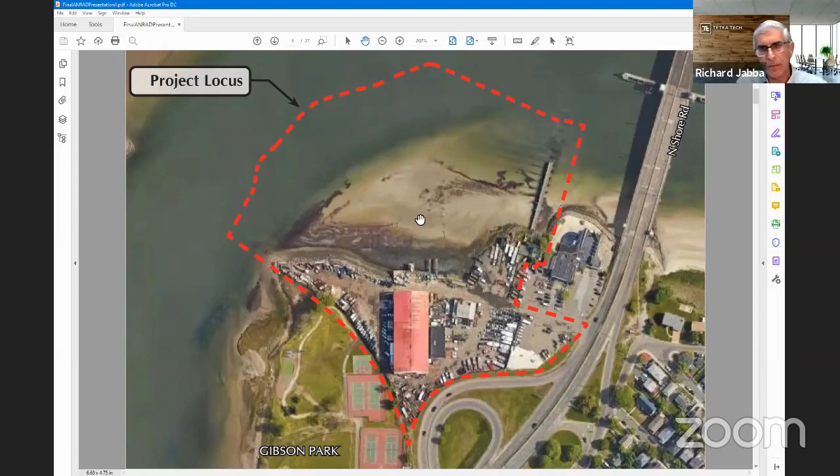So this is a view looking at the parcels and the survey of the area. There are 4 parcels, the largest one being the main one where the current towing operation is. And on that parcel, there's 3 buildings. Next to it is the National Grid parcel towards the right. And then on the far right are the 2 other parcels.

So again, the project site is mainly a relatively flat site at approximately elevation 10, FEMA elevation of 10. It's mostly within the flood zone, and I'll go over the flood zone areas in a minute. The site is completely developed along its entire borders and all the parcels with either buildings or pavement or gravel. And again, I'll go through that in a minute.

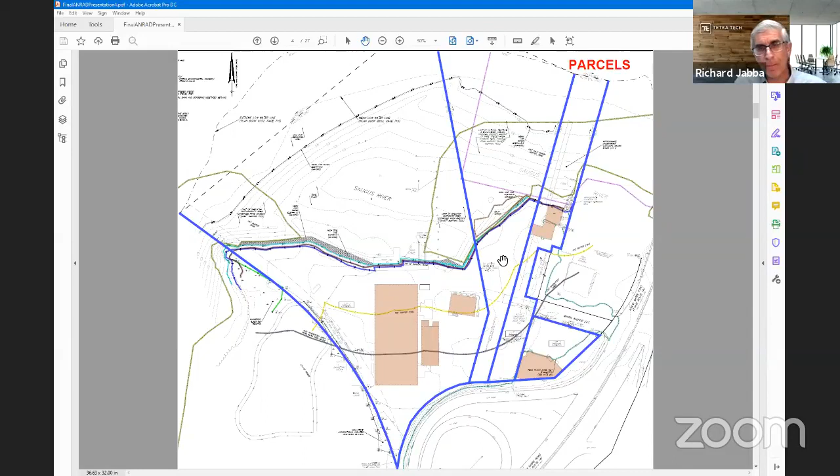So the resource areas that we're looking to get your approval on are the bordering vegetated wetlands, tidal flats, land containing shellfish, estimated habitats of rare wildlife, coastal bank, salt marsh, a fish run, riverfront area, and land subject to coastal storm flowage.

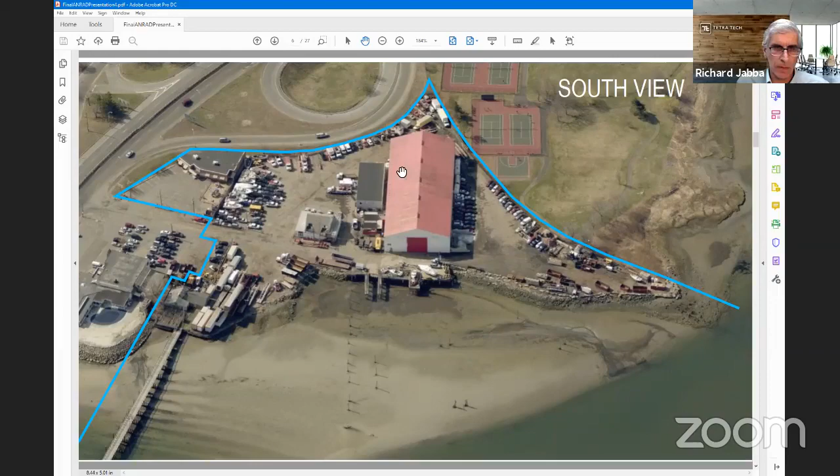This was originally marshlands that had been filled over the past 50 years or so. There was a marina that operated there, Fowler Marine. There are still some piers along the shoreline, and I think they're still currently in use. But essentially the entire shoreline's been developed. And I'll go through some of the pictures of that shoreline area. But behind all the shoreline, again, it's been all disturbed wetland resource areas.

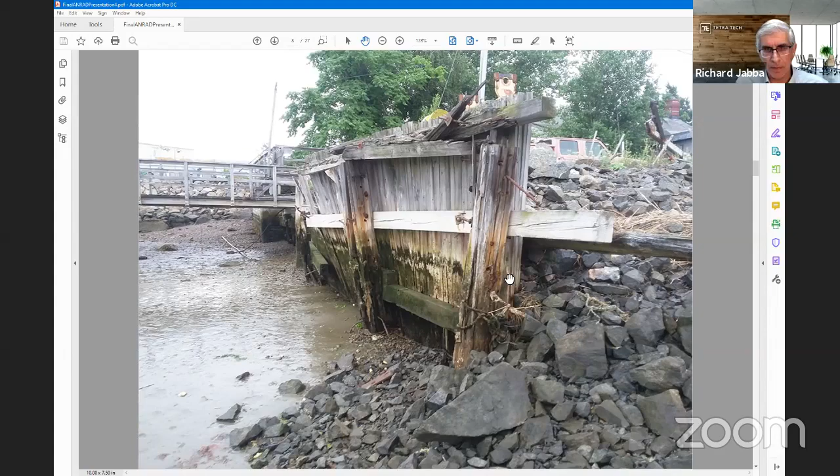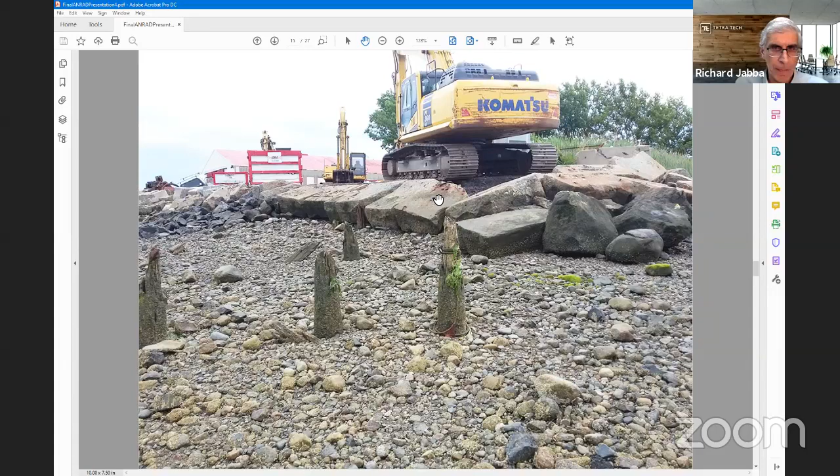And lastly, in the corner to the west is a view looking towards the east. These are actually old piles from the bridge of the Boston and Maine Railroad that went to Revere Beach. So that's what this property borders, that former railway. And this is a view of the wetlands looking from Gibson Park towards the site that you had just seen.

So now I wanted to go through each of the wetland areas and explain where they are. And so again, this is the west side of the site. Looking in plan, north is on the top. And there is a bordering vegetated wetland. It's approximately 21 feet in length that runs just inside the property line and extends further into Gibson Park on the south side. So that's the bordering vegetated wetland. Okay.

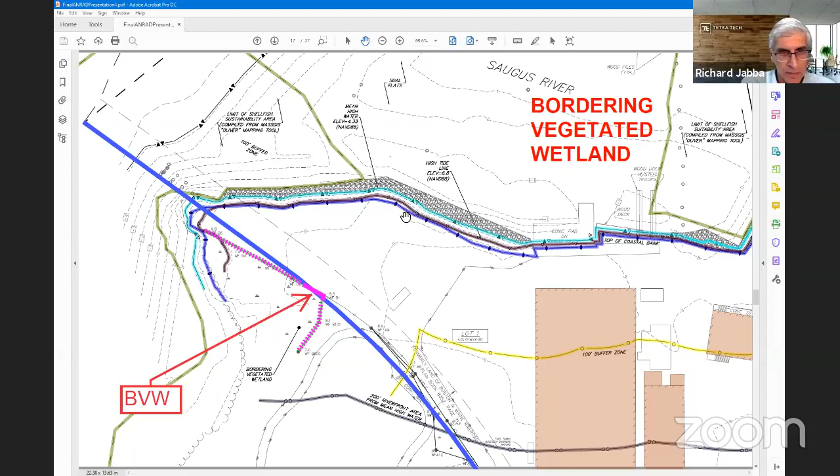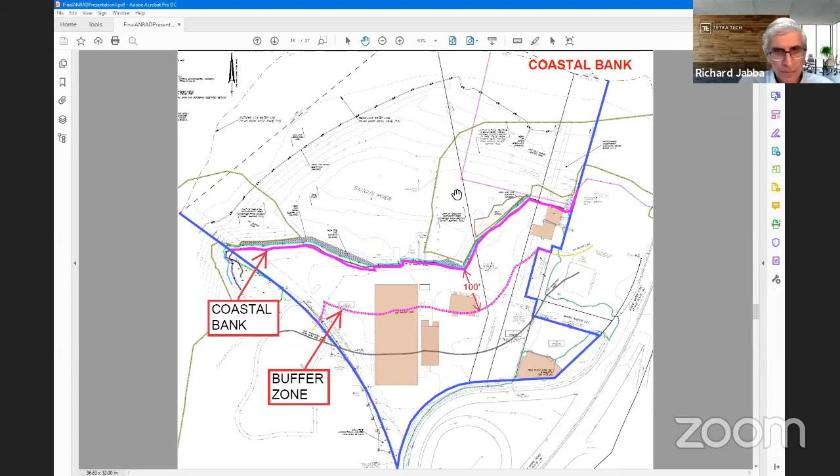Coastal bank. So coastal bank runs along the entire length of the shoreline, extending from the bottom of the bank, which is determined by slope, up to the top of the bank, again determined by slope. So it's essentially the entire shoreline running from east to west, including the vertical walls. And it has a 100-foot buffer zone that extends landward into the site.

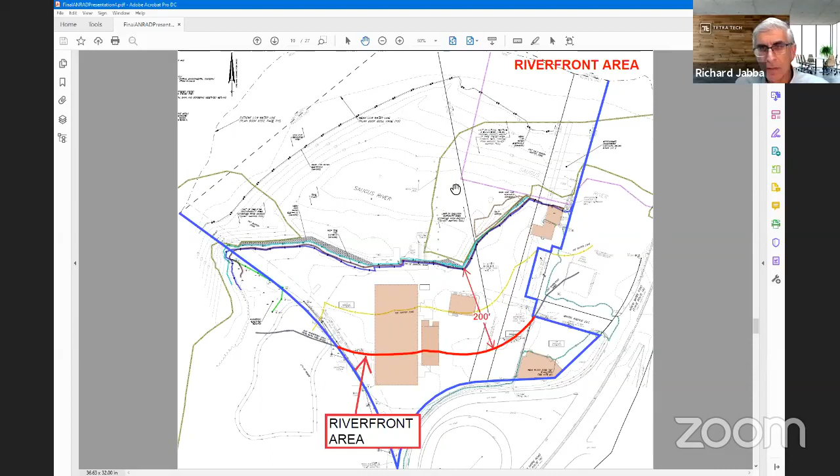The riverfront area extends from the mean high water, which runs essentially the same place as the coastal bank, and extends 200 feet landward of that area, so extends into most of the site. The tidal flat extends from the base of the coastal bank seaward to the mean low water line. So it's essentially all the area between the base of the coastal bank and the mean low water, which is this double dashed line within the Saugus River.

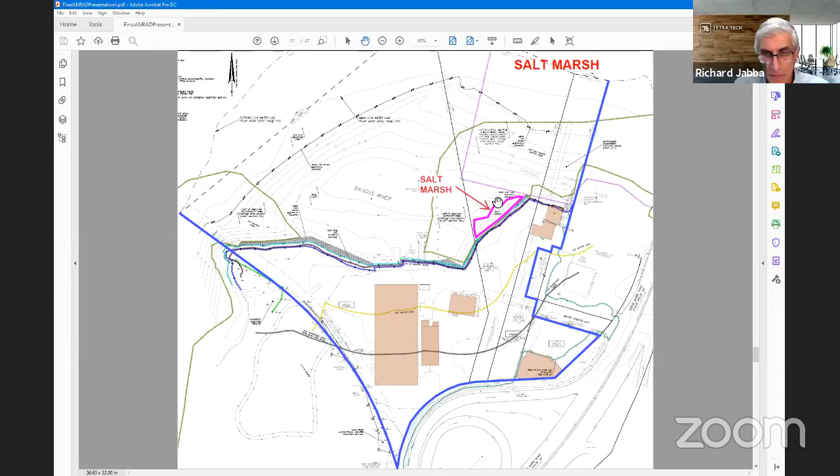Salt marsh is contained within this purple area. That was determined by visual inspection of the site, and it's of that picture that we had just shown you earlier. So salt marsh runs within this purple red polygon area, and that's just below the mean high water mark.

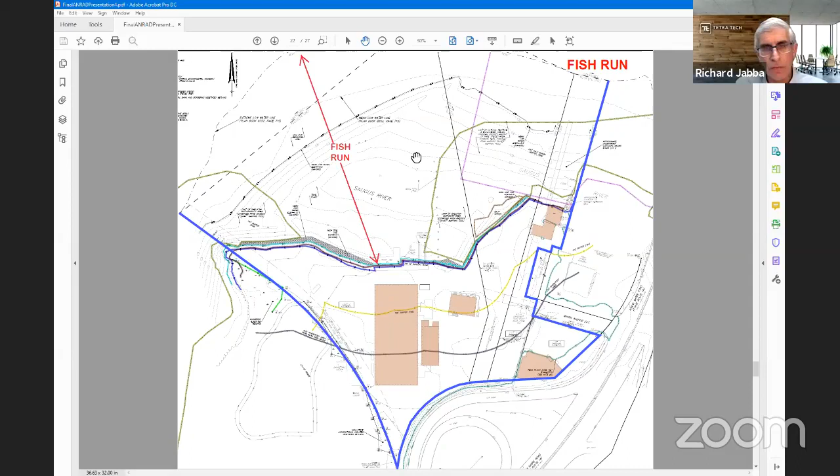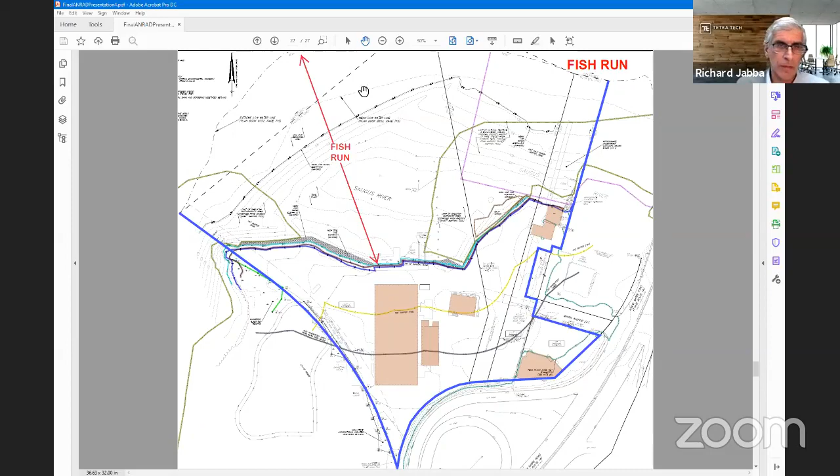Fish Run is a resource that was determined by CZM and extends through the entire Saugus River out to the mouth of the river. And so within the site, it includes all the area up to the bank of the shoreline. So Fish Run represents the anadromous and catadromous fish that use the site, the river, for spawning and habitat.

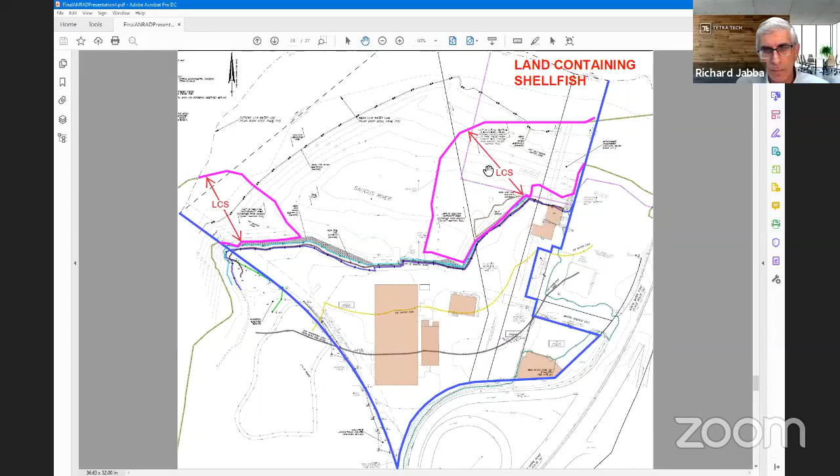Land containing shellfish is determined by the MassGIS website reference that it includes these two separate areas on the east and west sides. Both of these resource areas are demarcated by this pink line on, again, the east and west sides.

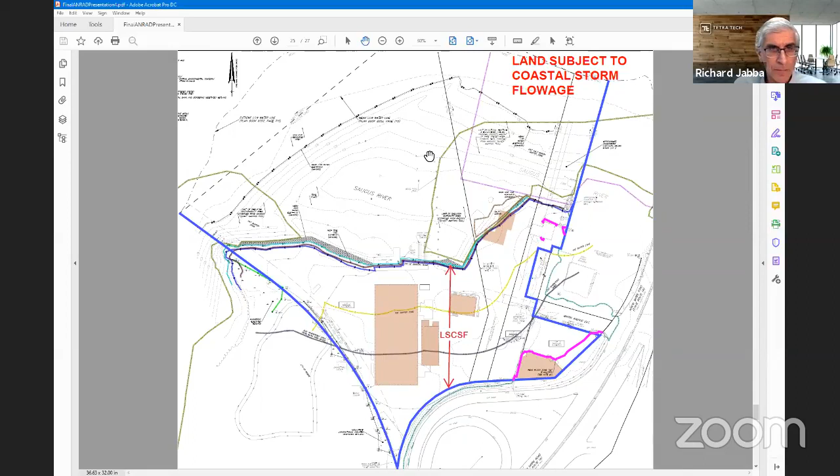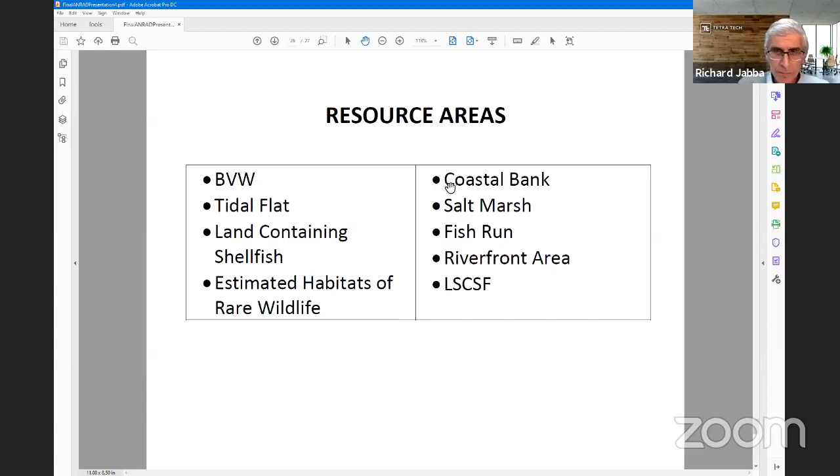So those are the resource areas that again we wanted to go over. Let me know if any questions on them. Any commissioners have any questions? I have a question. Excuse me. I'm just looking to find out, you're just looking for us to confirm these resource areas, correct? Correct, yes.

This is not an application for a current building. Is there a building being proposed at this site? This is, and I'll answer that. Heather, this is just to determine the resource areas. Anything that happens as far as development and building comes afterwards. They still gotta go through the order of conditions and all that other stuff with site plan review and everything. A lot of the neighbors called me and I told them, this is just to determine where the resource areas are. Okay.

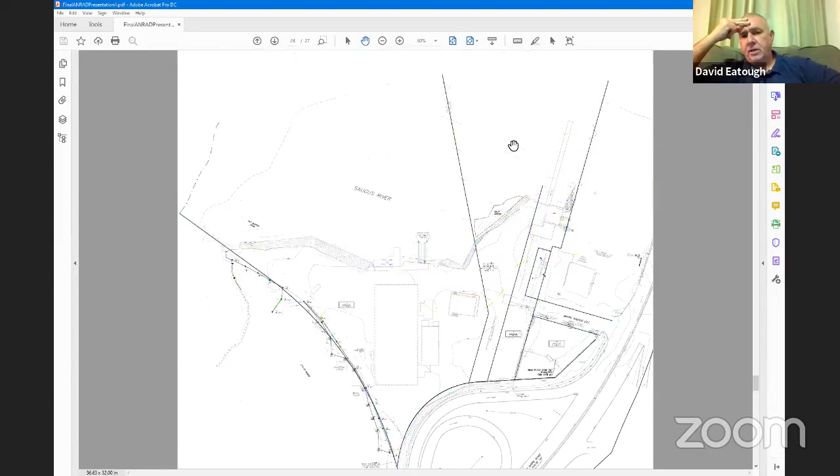Any other questions by any other commissioners? Could we go back to the estimated habitat? Sure. Could you clarify how that was established? It seems like a very random line. So that's established by the state Natural Heritage and Endangered Species Program, where they determine for the whole state where all these potential or existing wildlife areas exist. There are several within like Boston Harbor, and this one in particular was for the common tern, I believe. And again, it extends much further, but this is just a portion of it. So that's a state determined resource area.

Do you know what kind of rare wildlife lies within this area? A common tern. The what? Common tern. Oh, okay. And you'll see them there flying around. They're a bird that is a pain, just like the piping plovers, you know?

All right, any other questions by any other of my commissioners? I know we got a couple other people here from Redgate. If you guys have anything you want to add, more than welcome to unmute yourself. But I don't see any other questions from us at the moment. I think we're all set. All right, do I have a motion to approve the ANRAD as determined? I'll make the motion. David will make the motion. Do I have a second by one of my commissioners? I'll second it. Seconded by Heather Legier. All in favor? Aye. Aye. Aye.

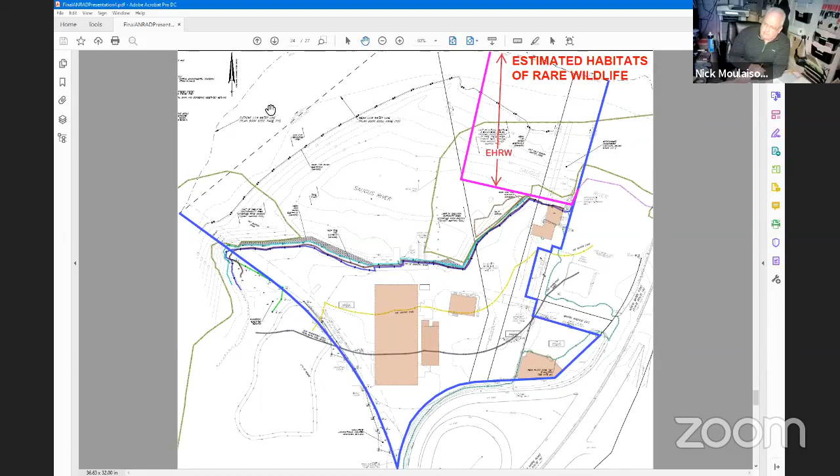All right, next item on the agenda is 16 and 14 Beverly Street. They have actually requested to continue the meeting until next month. They are in talks with the city engineer to try and come up with some sort of a game plan for stormwater management. So they are not on the agenda. They are continued until next month.

Next item is 320 Revere Beach Boulevard, which is a project that we gave an order of conditions to 3 years ago, which is coming up to expire. They're just asking to extend the order of conditions, I believe, until May of 2022. Who's here for it? I know you don't look like Rick Salvo, that bottom picture there. This is Eric Bradanese from Engineering Alliance. I'm here on behalf of Rick Salvo.

I had to log in with his Zoom invite, so I'm not really sure how to change my name down the bottom there. No, don't worry about it. Eric, just spell your last name for me. It's B as in boy, R, A, D as in Dan, A, N, E, S, E. Perfect.

All right, so this is a pretty simple thing they want, and a lot of the developers do it. The project takes a little longer than expected, and they just need an extension on the order of conditions. Exactly, and it's just to do some fine grading, landscaping, and then the final paving. That's all that's left to be done. We want to extend it till when? May of 2021 or May of 2022? 2022. So we want to extend it to May of 2022. Any of my commissioners have any questions for him?

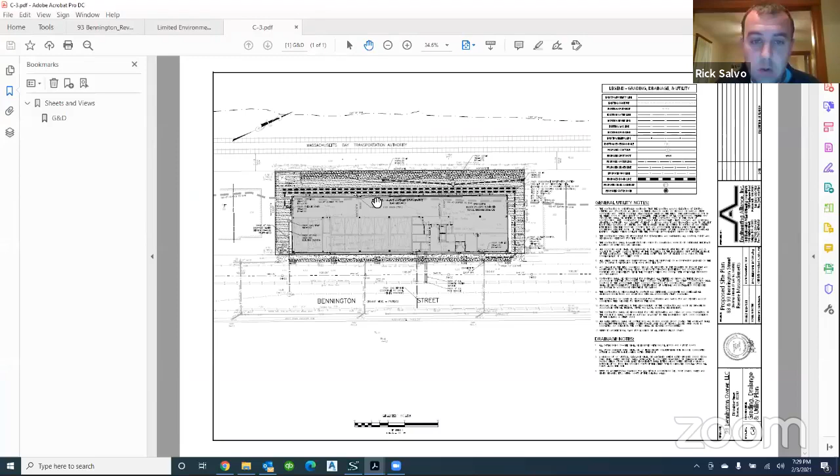And so behind the building, we had shown these big dashed lines back here. We had shown some ADS pipe that was going to be below this open at-grade parking back here. So there were catch basins to a water quality manhole that drained into these ADS pipes. And then there was this overflow pipe that came out to the closed drainage system in Bennington Street. So what ended up happening is our pipe was about a foot or so too low based on the borings, the estimated seasonal high water table.

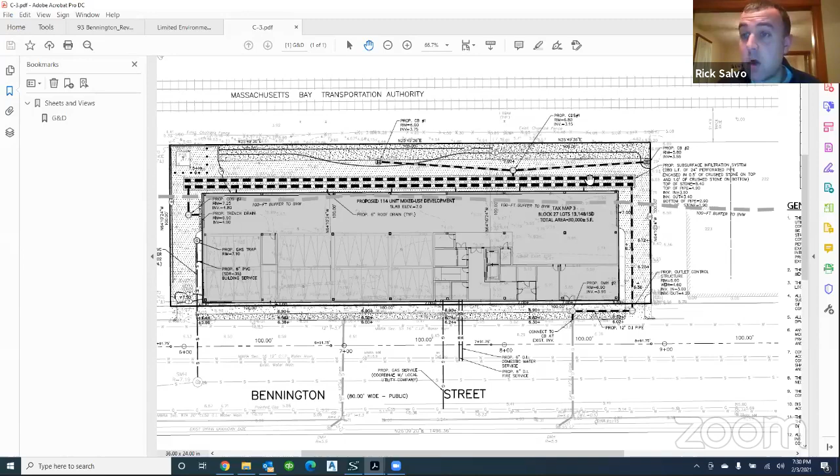So all this infrastructure, the pipes, the manholes, the catch basins, are all eliminated. And now the plan is just porous asphalt where it will directly infiltrate. So that's this plan here. The roof will drain down into the stone bed beneath. And then this outlet pipe is set about a foot to a foot and a half above the bottom of the stone. So we still provide all the required volumes, required recharge, required water quality volume to meet all the stormwater standards. We've just eliminated those structures and any adverse impact on the groundwater separation.

Did they not want to add to the effluent that's going into the system or something? No, the DEP has a requirement where you have to have at least 2 feet of separation from a system to the groundwater table, and there's also a separate requirement where if you don't have 4 feet of separation from the groundwater elevation to the bottom of your system, you have to provide groundwater mounding analysis. We had not met that because the groundwater is only 3 feet below grade. So we made the system a lot more shallow to provide the correct separation, and also provided those mounding analyses to show we're still providing enough volume above those mounds to meet all the stormwater standards. Okay.

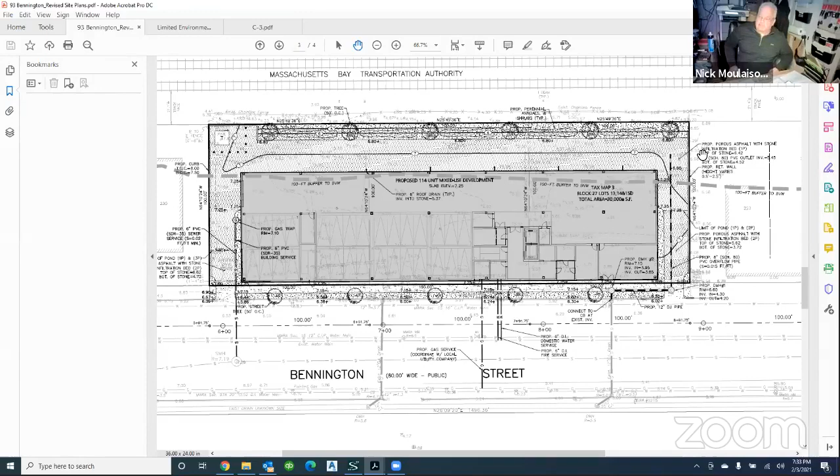Last item on the agenda was an added item, 46 Arcadia Street, certificate of compliance, Andrea Gail Bennett. They got an order of conditions from us, I believe last year or the year before. She remodeled the house, did all the work. I sent you all the pictures. The only reason I put this in as a late item was because she's closing on the house on Friday, and I don't want to hold her off until March. It wouldn't be fair. And since the project was done to what we wanted, I was okay with adding it. So Andrea, unmute yourself and give your name and address for the record. Andrea Gail Bennett, 19 Francesca Drive, Lynn, Massachusetts.

All right, and I know we looked at the pictures, and I know I emailed you back. The house looks incredible, by the way. I think you guys did a great job inside remodeling it, and I'm not sure if my commissioners have any questions. I know Joe had emailed me back, and I know Joe's not on with us now. He wanted to just make sure that there were the openings in the foundation for the water to flow through, which I've seen. There's small windows, the garage doors, and everything all qualified for that. So it does make it up to spec and up to standard of what we need.

We did it per the architect and the engineering plans. Correct. Yep, which is what was approved in the order of conditions. Perfect. All right. So with that being said, my commissioners don't have any questions. Do I have a motion to approve this, please? I'll make a motion. Someone raising their hand. All right, Heather makes a motion to approve. Do I have a second? I'll second. Seconded by David Eatough.